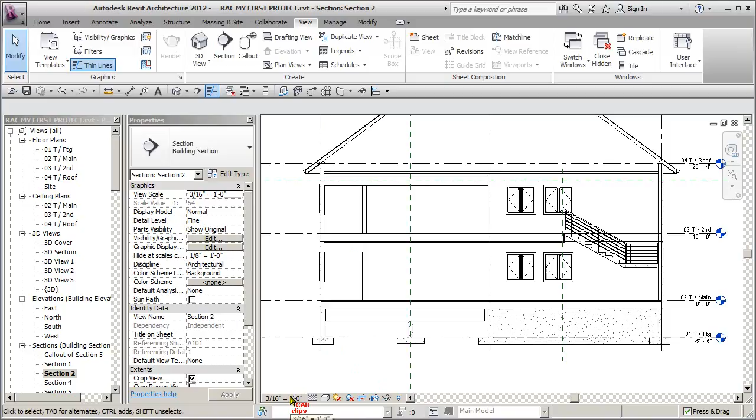And all we're going to do here is, oh, this guy needs to be reattached since we changed our thickness, which means that probably has to happen. No, looks like that one's done.

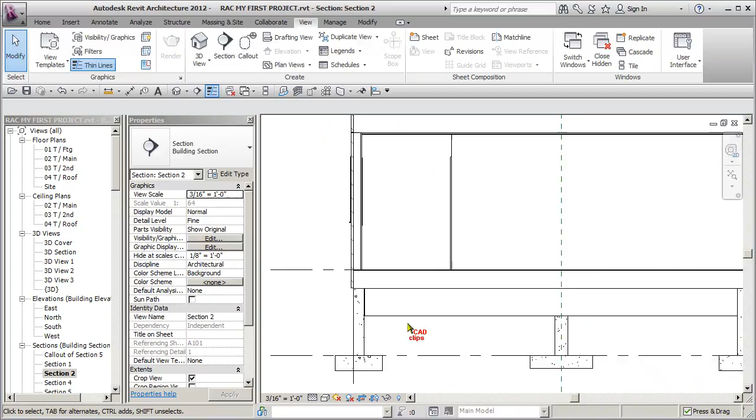This beam looks like it needs to get stretched over a little bit. You can see that. And we can also use our align tool. Start to use your editing tools. Align here. Oh, align doesn't work with the beam. Looks like it's already talking to it.

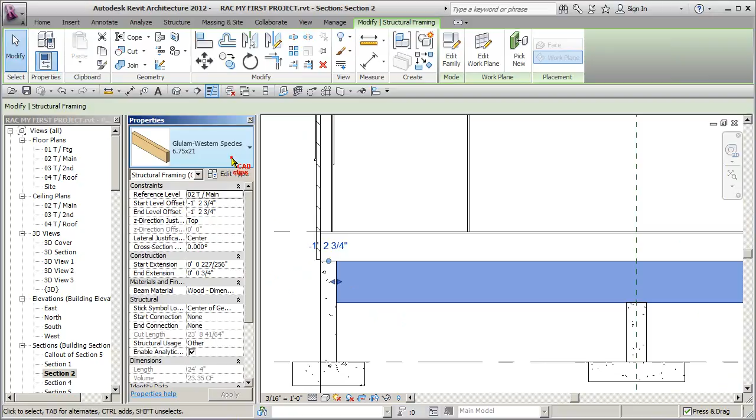You can see the analytical model. It's just providing a gap there. So we're just going to kind of close that off a bit. That beam might even be a little bit big, 21 inch deep. We might not have to go necessarily that deep, but we put that in anyway.

Now we're going to start off at the bottom and work our way up. So I really wish there was like a palette. One thing good about ADT and AutoCAD Architecture and AutoCAD in general was the palettes where you could put your favorites on a man-made palette.

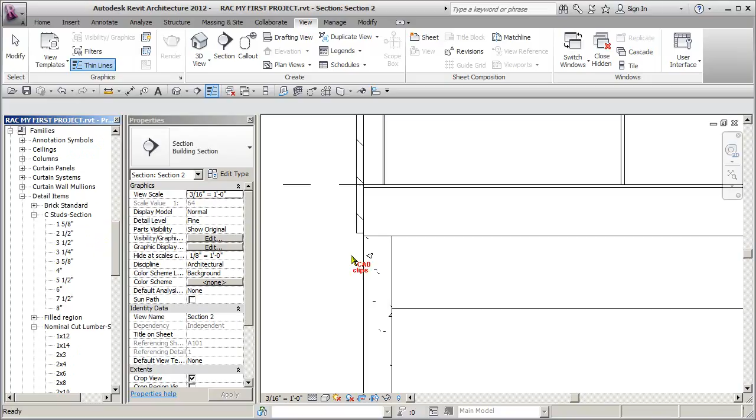So we don't need our C-studs. Nominal cut. So here we go, 2x4, spacebar, place. And then here we can place one there.

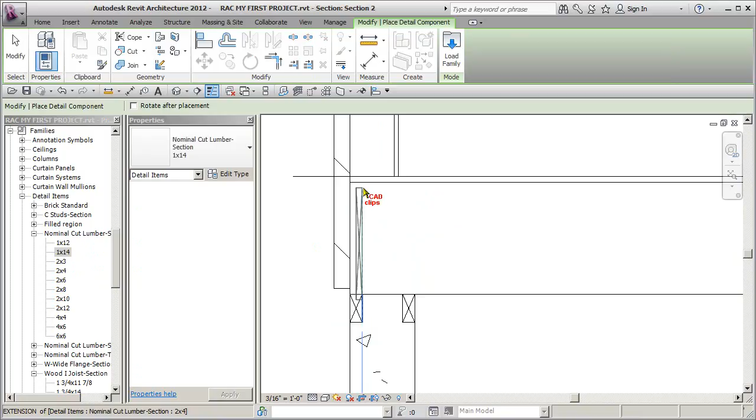Again, we can do that edit cut profile on there as well as down at the footing. Now we need a 1x14, spacebar to rotate that around. Place it there. We're going to come back and do those joists a little bit later.

Then we're going to go get a 2x6, spacebar to rotate. Pan our way up. Spacebar to rotate. Click. Oh, it's not going, so we use tab, click to get that one in there.

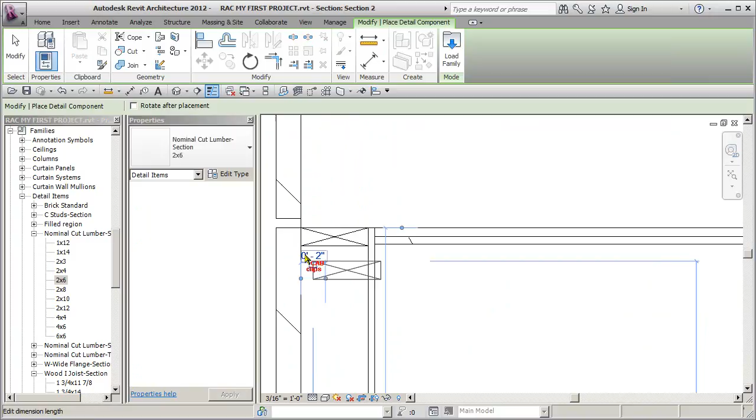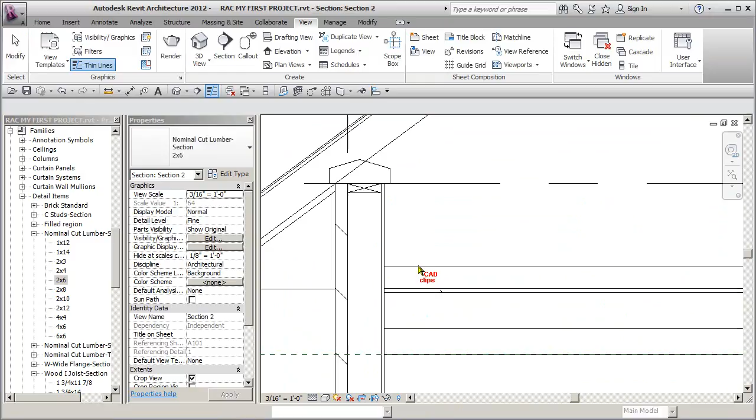Spacebar. So really what I usually do is take one item like a 2x6 or something like that and then go around and place them everywhere in the model as you require, and we can go in again and put a cant strip in here. Okay, that would be a good edit cut profile. We could edit that profile there and make it go up, and then we could add some blocking in there.

Let's put our 1x14 in here. And there we go.

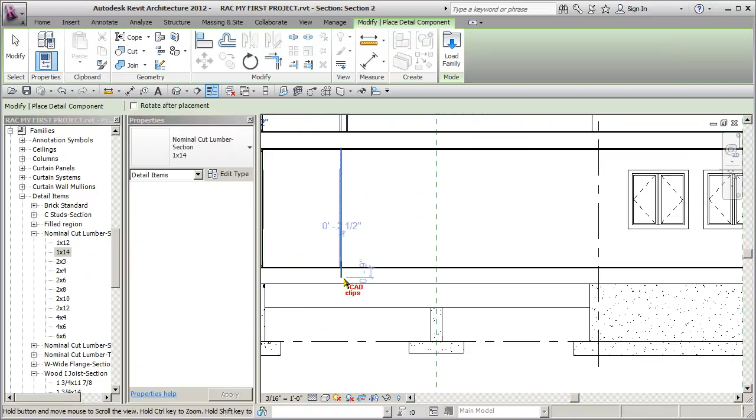Now, to go across here, our floor joists are going perpendicular to us. So what we're going to do is have a look at our wood I-joists here. And there's our 1 3/4 by 14 inches.

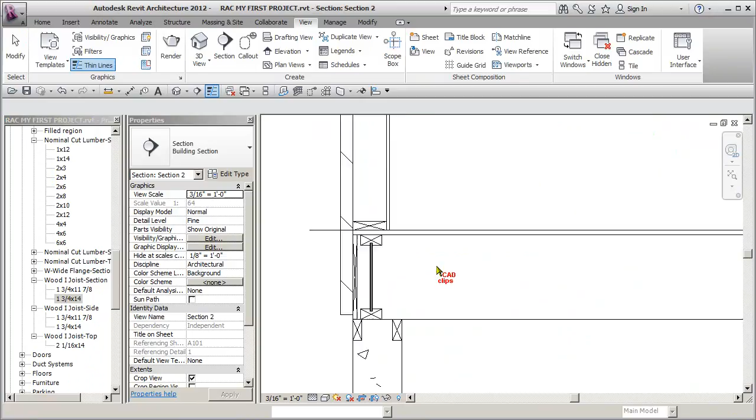I bring this in. I can place it wherever I want along here, most likely right somewhere near there. Okay. Then I can take this and I can create what is a repeating detail. So I can drag that and it'll place it along.

Okay. So watch. I'm going to go up to my annotation and I'm going to go to detail group, and no, that's not where it is. Under component here, repeating detail.

It's good for bricks and blocks and joists, and whenever you want to have a particular detail component repeated or arrayed, think of it as an array, and it's flexible in different ways. So repeating detail. And then, of course, here it is, brick.

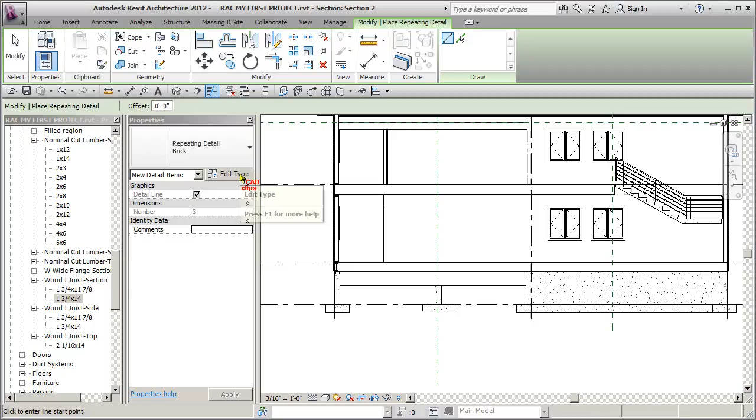We're going to edit this, and we're going to duplicate that, and we're going to call this wood I-joist section. And hit OK. And then we're going to go grab the detail component. Here we go. Wood I-joist.

This one right here. Okay, now layout is a fixed distance. Spacing is going to be, it's actually 12 inches if I go by the span tables. This is a 25-foot span, and at 14 we've got to go 12-inch centers. So that's good. I hit apply and hit OK.

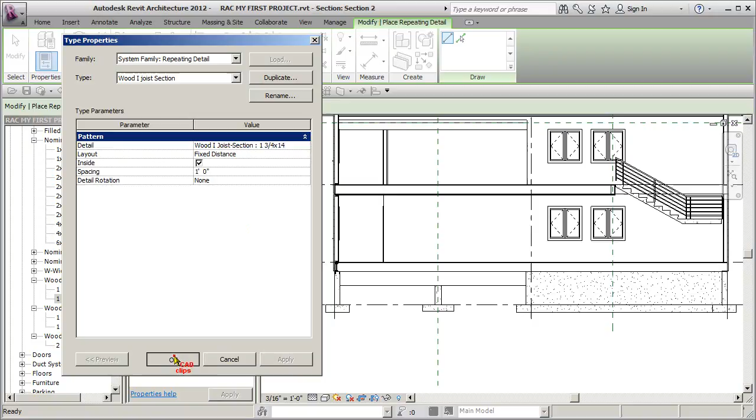So all I did there was I went to home, I went to annotate, component, repeating detail, and I made a new repeating detail. Now what happens is, watch.

I'm just going to test it out here. Click, click. Okay, escape. That's how it works.

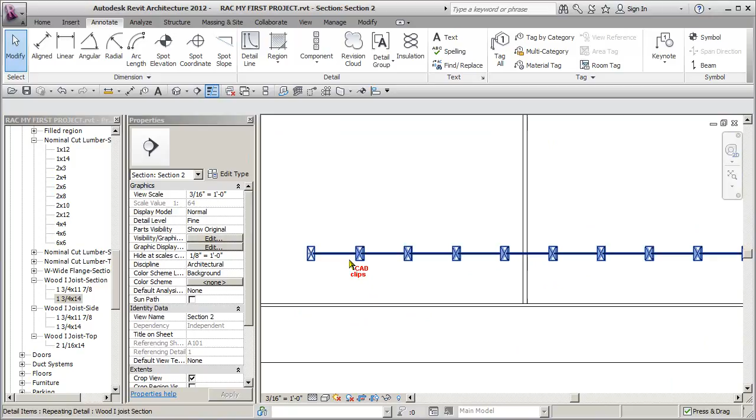But the problem is I need my component to be rotated. So I'm going to pick on here, and I can go in and just edit the properties and say, okay, let's see what's going on. Detail, layout, inside spacing.

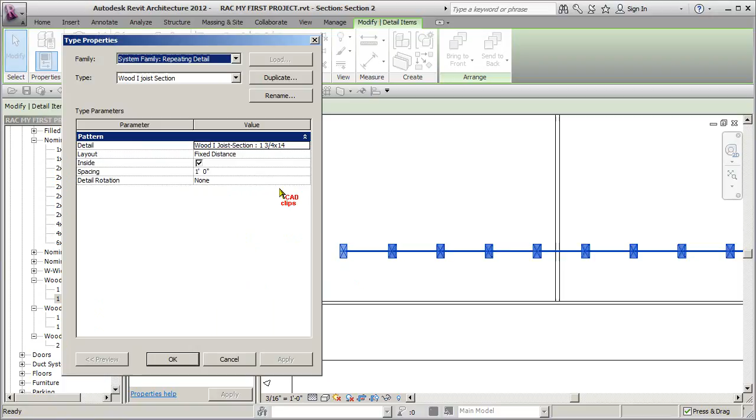Where is my rotation option? Back into here. Inside spacing—oh, here, what am I saying? Detail rotation, let's go 90 degrees clockwise. Okay, let's go the other way. There we go. Hit OK, click out.

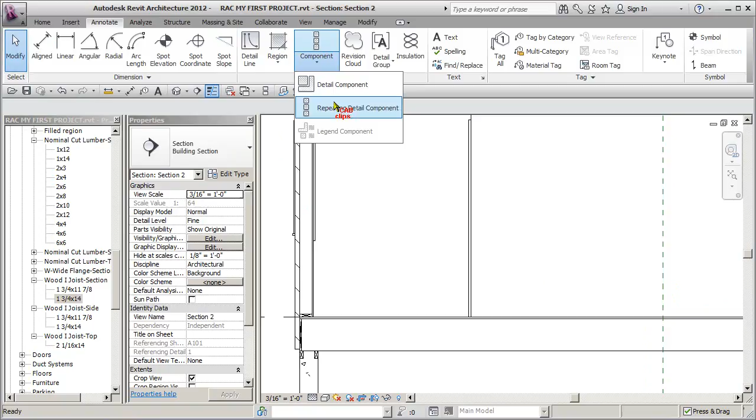So now I can take this and just delete it, and I can take this guy and delete it. So now I can go repeat detailing. I can pick that off of there, and guess what? Click on here.

And all the way across to there. Escape, escape. So if you pick on here now, I might need to add one in on the end, and let's just see if we can say here, layout rule is fixed distance.

What if we say maximum spacing of 1 foot? Let's see if that gives us what we want, maximum spacing. So it'll even it out and make it a little bit less if it has to.

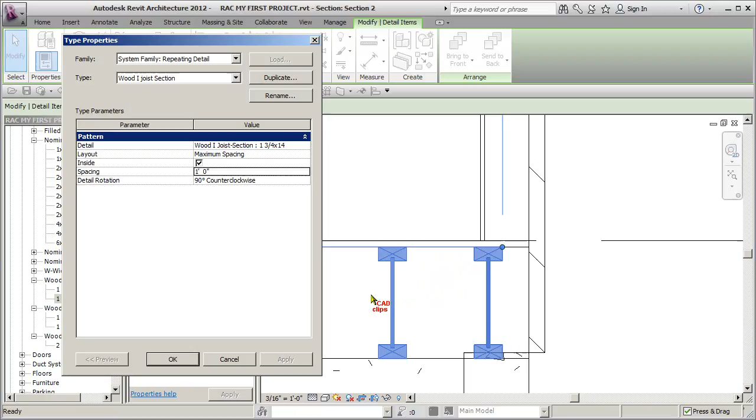Okay, hit OK, and now I can go back and add my 1x14 in here, escape, escape, and then I can pick on my repeating detail and drag that over to there.

Isn't that wonderful? I can see the smile on your face. Now, easy enough to do again. Here we go. Component, repeat detailing, pick it off of here, pick your point, drag.

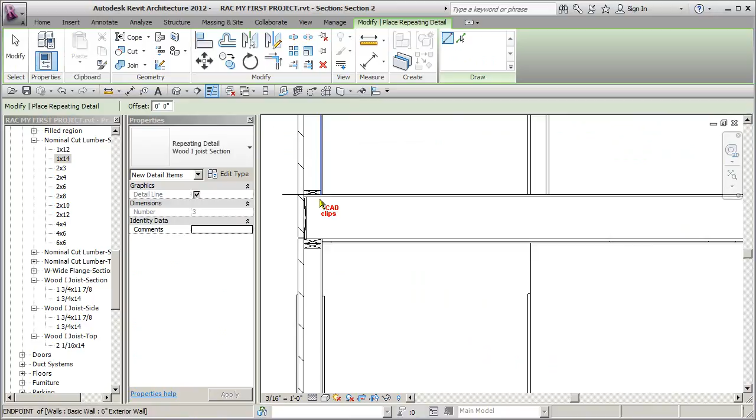I should have placed my 1x14 first. Oh, it's a beam. Pick, done. Zoom out. Okay, there's my joists.

Okay, we can put these in 3D. We will have some lessons supplementary after this series, and they would show up. But for the most part, you can go in and do that, and you can do the same thing with bricks going vertically. You just have to change your angle, change your spacing type, and have it go up.

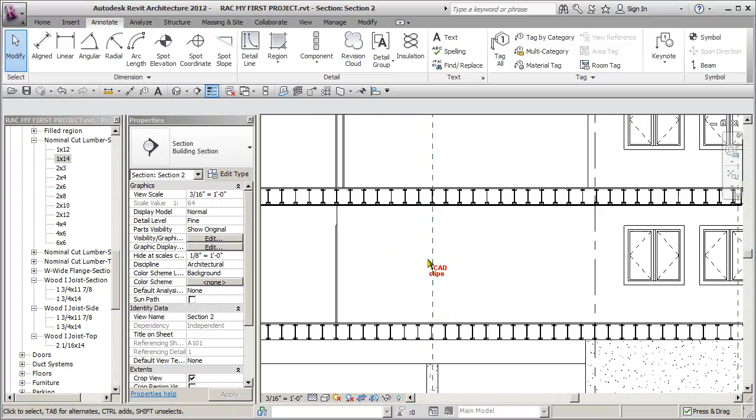You could do that with masonry blocks or bricks. Here we've rotated it. The other way you wouldn't rotate it, etc. It takes a little bit of experiment.

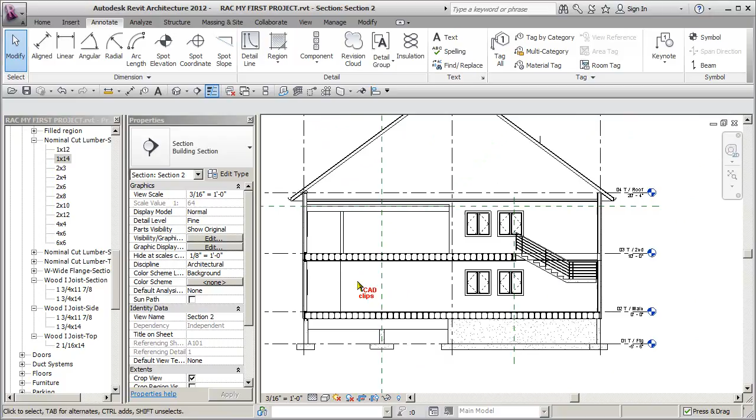So I would say at this point we would go through here and continue adding in our 2x6s and our 2x4s, etc. in here to kind of complete this up.

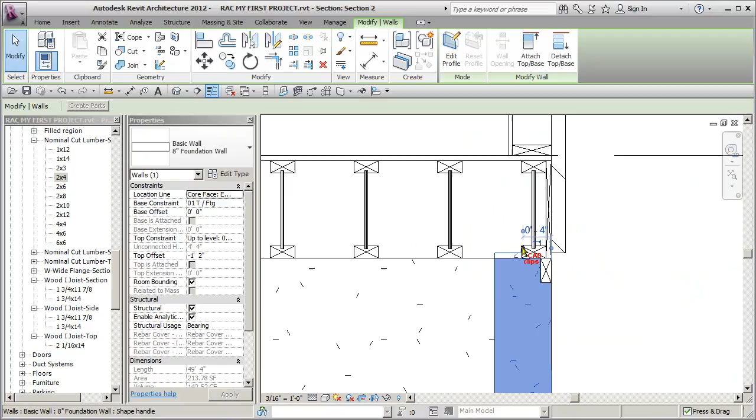And it looks like our wall here, this guy has to come down a little bit, down that 3/4 of an inch, and pick on here, create similar. You see that? You can do that. That create similar is great for detailing, right?

You just pick on here and say, give me one of these, and then off you go, right? You don't have to guess what it is or go find it on a palette or whatever you want to do that way. Now, is that a window there or something?

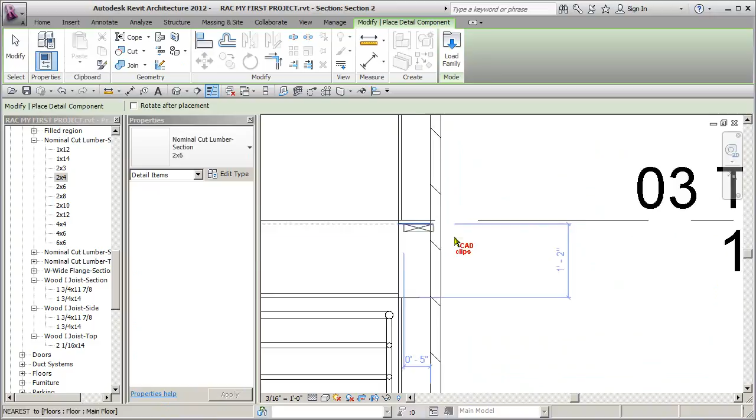Door. Oh, that's right at the stairway. Okay, so we can go in and put our 2x6 in there. And yeah, that's actually the way that would go.

So adding in there, then I would go in and add some insulation. What do we set to be? A width of, let's go 5 inches.

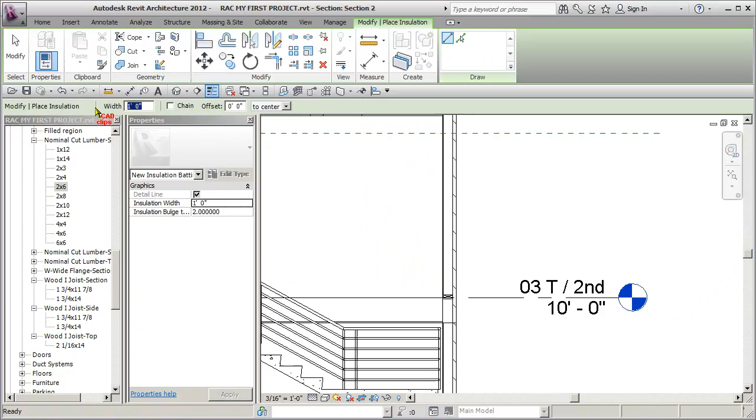Zoom in a little bit, pick on here. Drag up, hit escape, grab another 2x6, spacebar.

Click on here, find that grip, tab to grab the insulation. Tab, tab, tab, there it is, and then whoosh, pull that up.

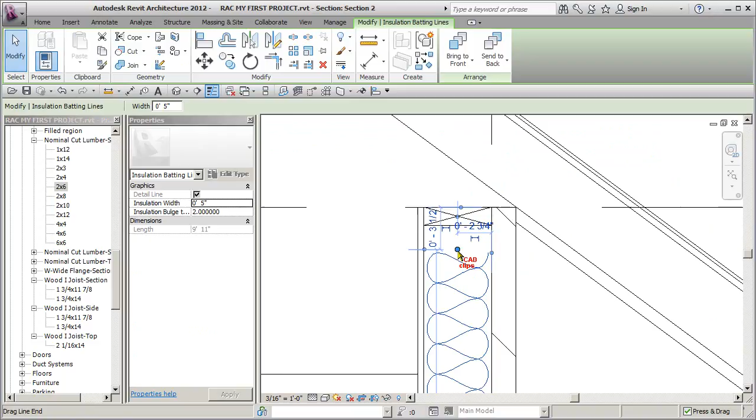Okay, if you want to change the thickness after, there it is. Okay, the bulge, which will give you how the swirly radius is there.

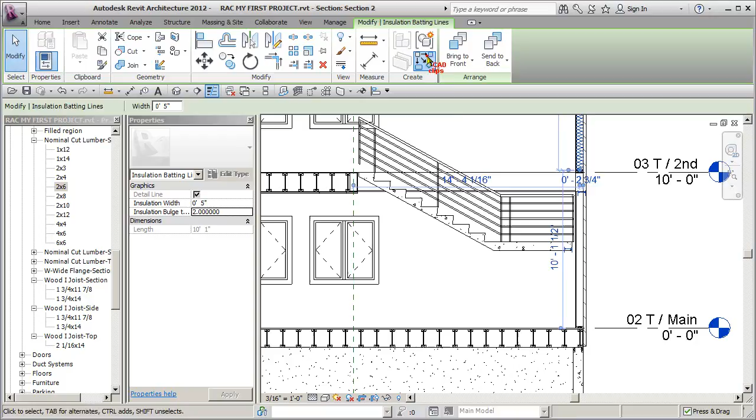And again, you can go in and add more detailing and edit cut profile of things like this. So we're just, again, click on here, create similar. Once you get a couple items in, you just have to keep clicking that create similar button, right?

Escape, escape, pick on here, give me one of these. Oh, here, give me one of these.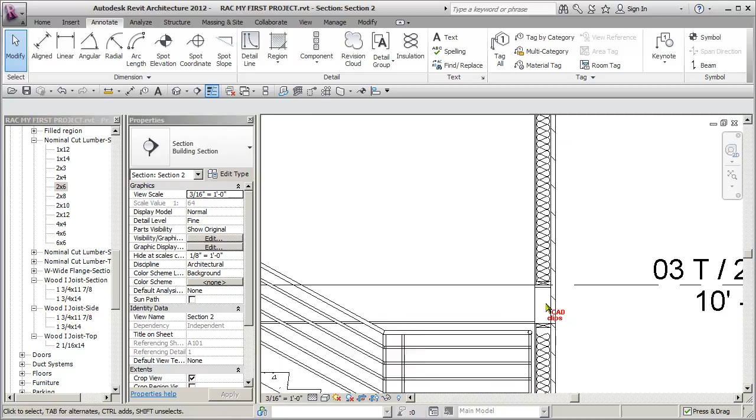Spacebar to rotate. You need to fill this in with another piece of wall or some framing inside of there. And let's put some insulation across. Oops, sorry about that. Insulation, and let's go by a foot thick up here in the ceiling space.